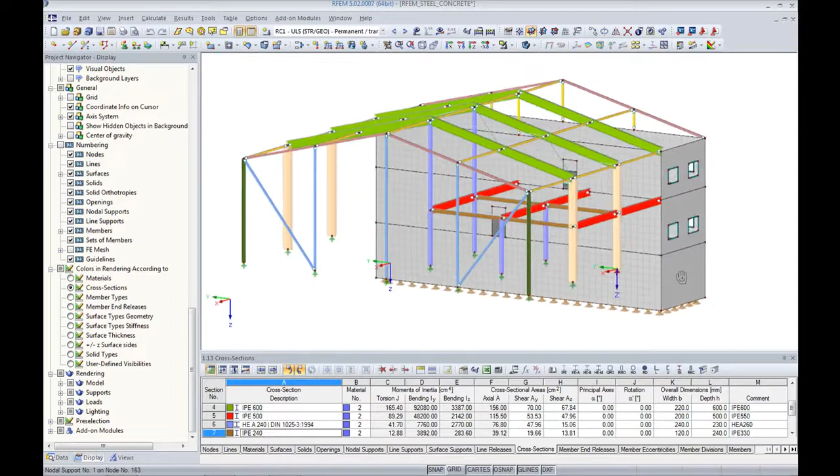In RFEM, we can simply access the export to the ISM interface by going to File, Export. Here we select Bentley ISM. After that, we have to specify a file name.

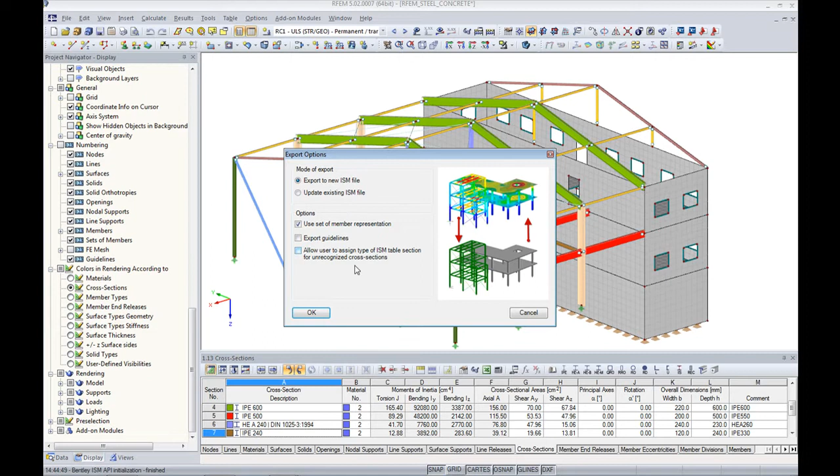RFEM communicates with the ISM Synchronizer and can export to a new ISM file. After we initiate the export, the ISM file is written and can be shown in the ISM Synchronizer.

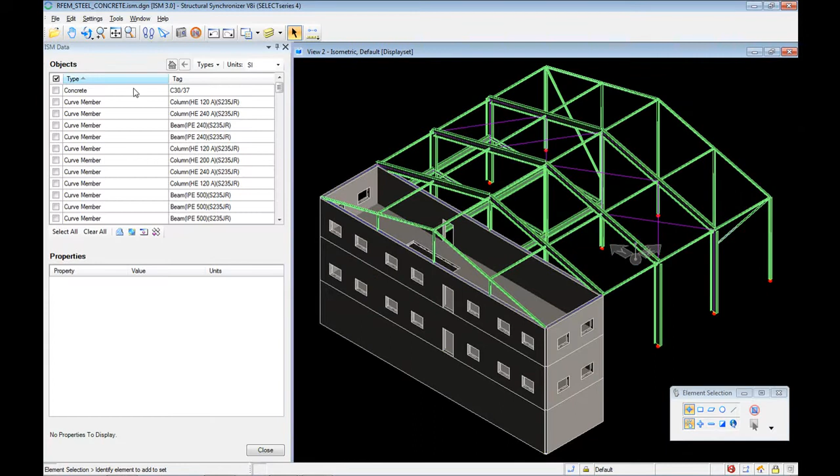In the ISM Synchronizer, we open the exported file. All the structural information has been exported. The information includes section information, wall information, and also information, for example, for structural supports.

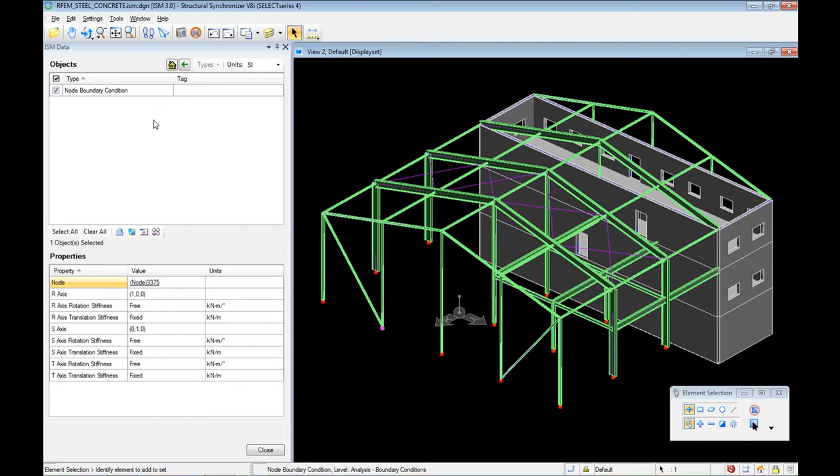During the export, it's possible to use mapping files to map different cross-section descriptions and cross-section names, and the same is valid for material names.

Models can also be updated from Dlubal to Bentley ISM. In many cases, changes occur during the planning process.

Here, a column is deleted and some bracings are added in RFEM. When adding bracings, you simply can click from one node to the other to enter the bracing, or you can use the drag and drop function to copy one diagonal to the other side of the building.

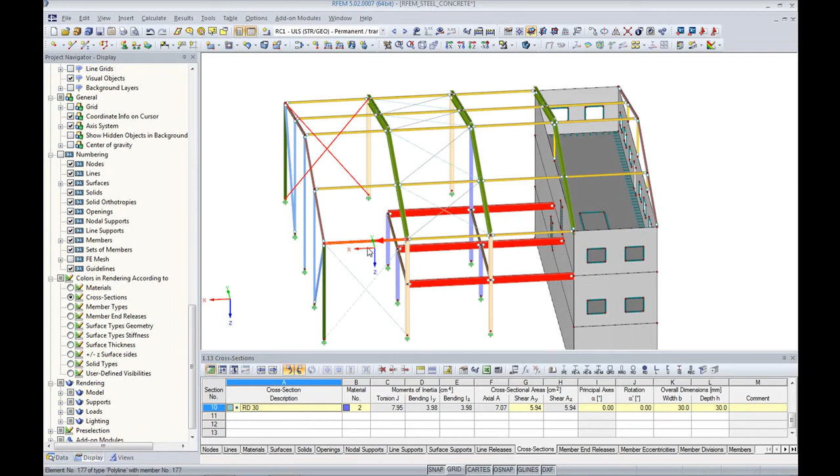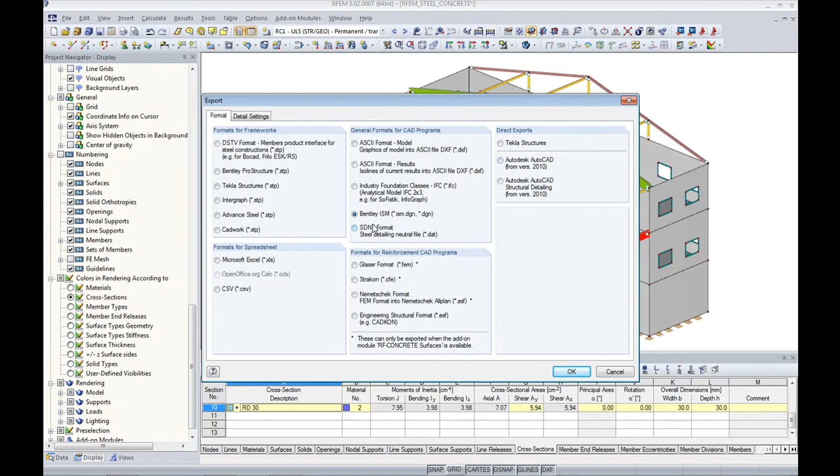To synchronize the changes with the ISM application, we start again the file export function in RFEM. We choose again ISM from Bentley. We update into the previous exported file. Now we choose the Update Existing ISM File option.

The ISM Synchronizer is started during the update process. Inside the ISM Synchronizer, we can accept the made changes. Before we do this, we can view them in the 3D model. Changes are highlighted.

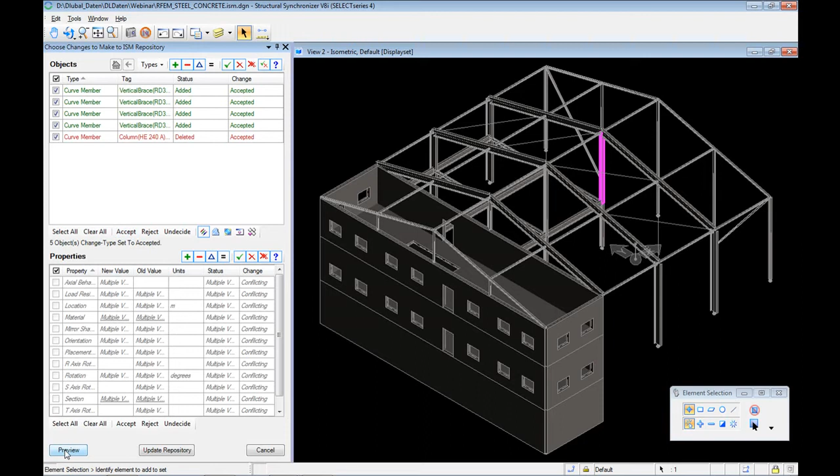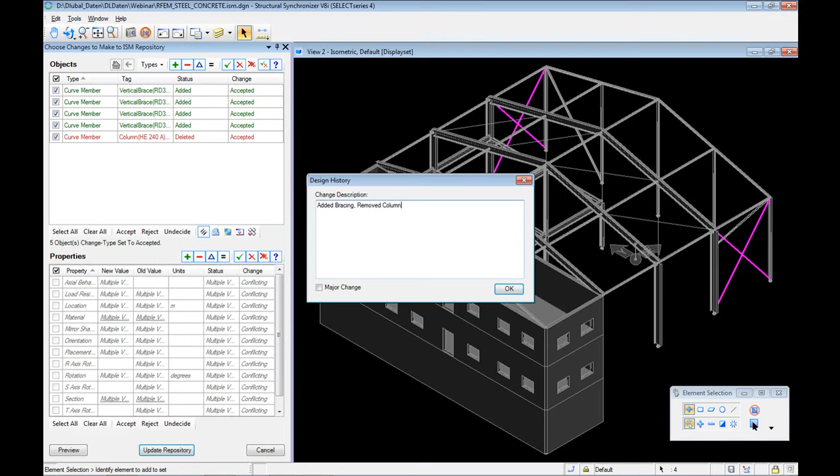Finally, I can update the repository. To address specific changes and to remember what has been done, we can add a change description. This information can be used while looking at different versions of the updates.

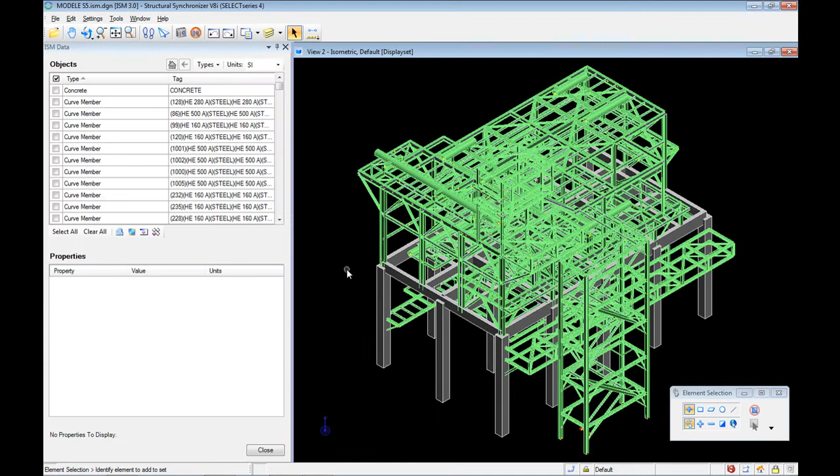Similar to the export, we can also import from Bentley ISM. In the ISM Synchronizer, we take a look at the structure that we want to import to Dlubal software. The ISM Synchronizer link works the same way for Dlubal RFEM or Dlubal RSTAB.

To import the model into RFEM, we start the File Import dialog and choose Bentley ISM. Then we select the file we want to import. After this, a new model is created in RFEM.

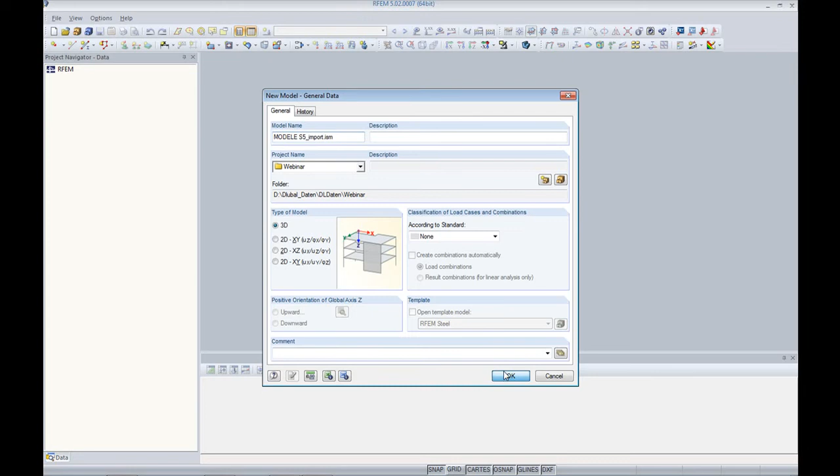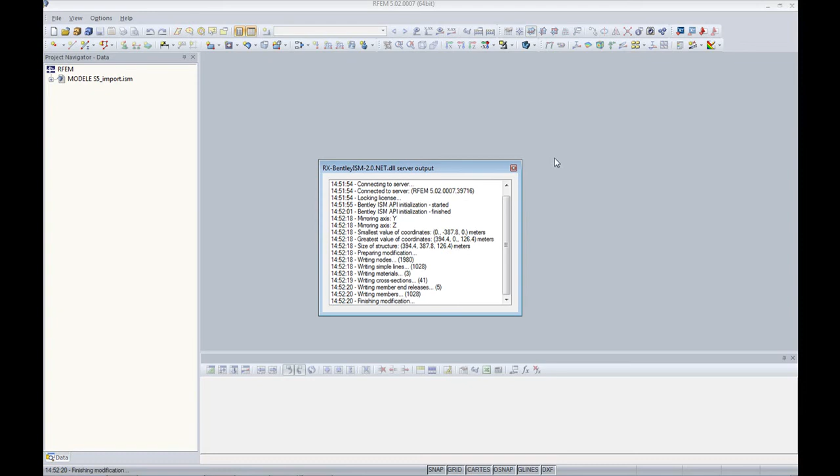We choose Import to New Model. After the import process, the model is displayed in RFEM. In RFEM, I can check the cross-sections and the materials.

In the display navigator, I can hide or show different settings. For example, I hide here the member end releases.

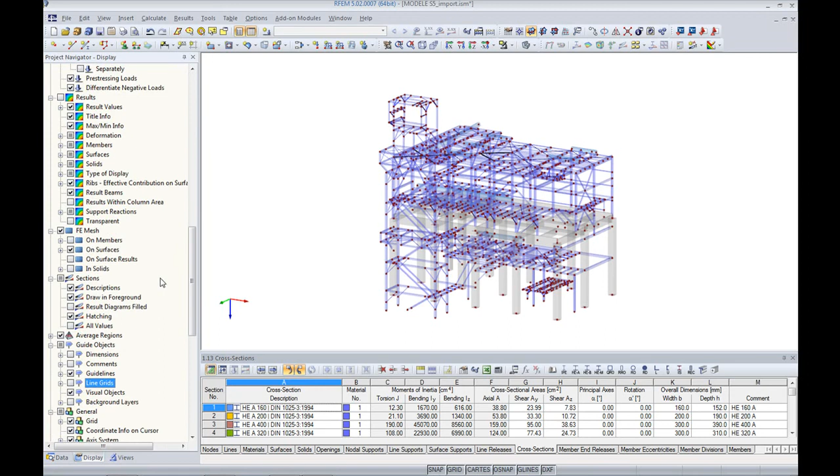Also, I can use different views of the model, and I can use different colors for different cross-sections to identify if the cross-sections are imported correctly. Each cross-section has a name which is shown in the table below.

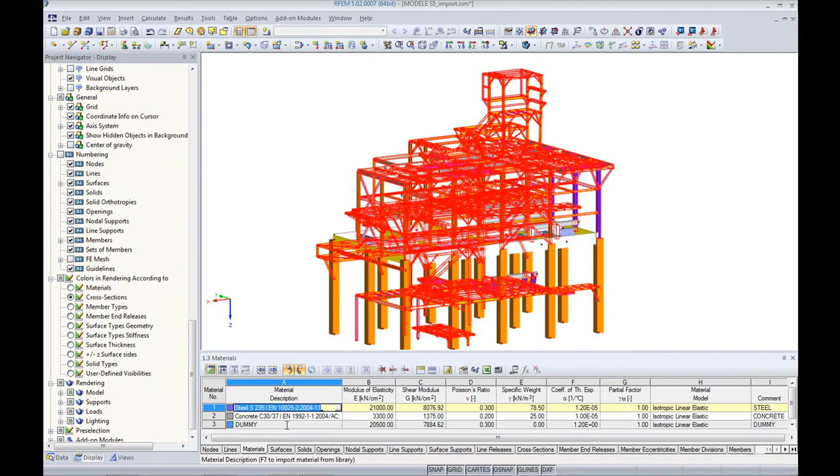Same thing is true for materials. If material names do not match, we can use a mapping table to map them. Same is valid for cross-sections.